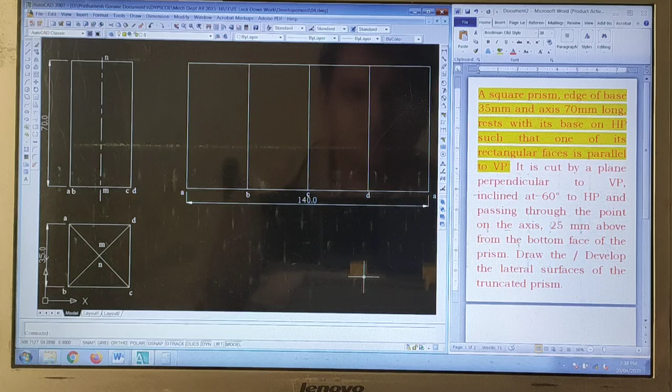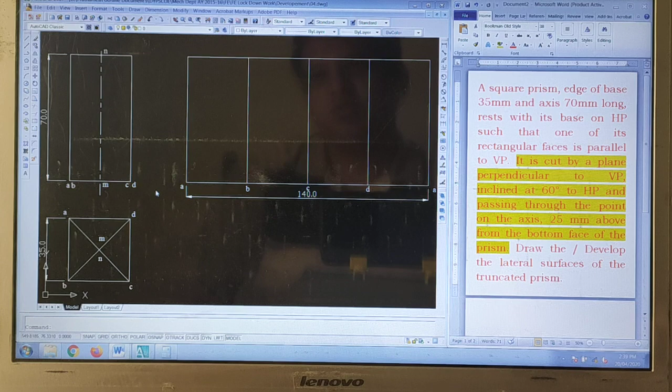Now this portion is what we are looking for in this particular solution. It is cut by a plane perpendicular to the VP, inclined at 60 degree to the HP, and passing through the point on the axis 25 mm above from the bottom face. So from the bottom face a line of 25 mm - intersection point will not be there.

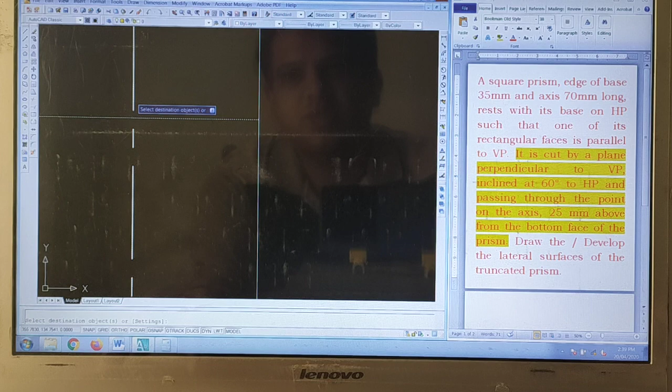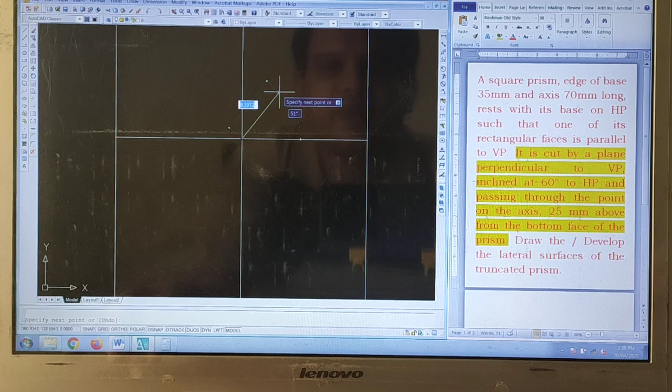So I have changed the property of this particular center line. Then a line at an angle of say 30 mm, then less than sign at an angle of 60 - this line we have drawn.

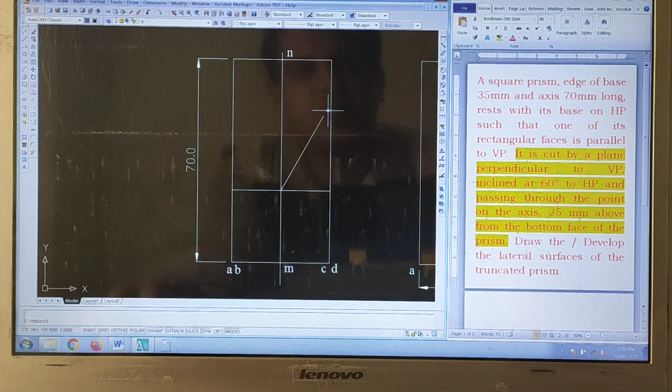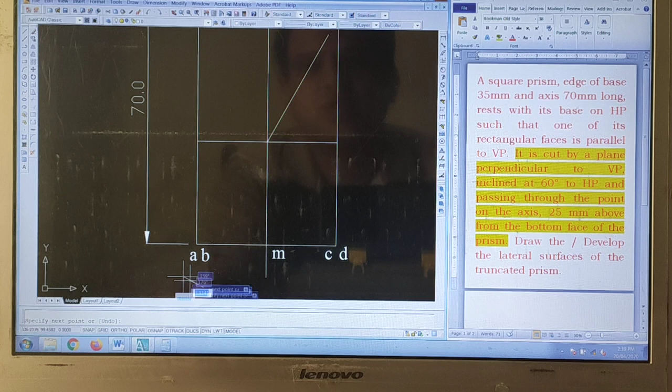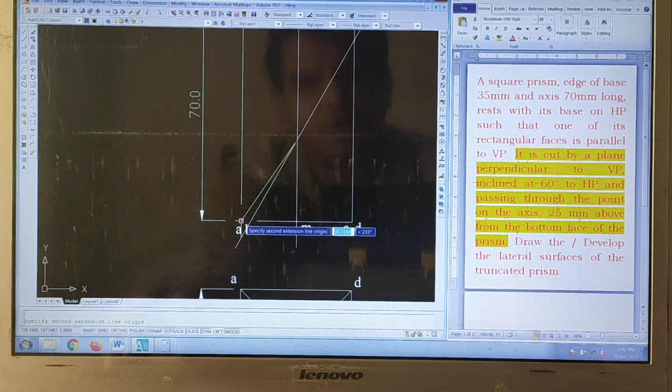Now it is up to this point only, so let us extend this, and over here let us extend the same line till this point, like this and like this, and let us delete this line, delete this line too, and mark the dimension of this particular point as 25 mm. Now we can convert this into a center line. Now this is what they are talking about, and this is also a cutting plane, so which equals to center line only, but whose color we should change to the yellow one.

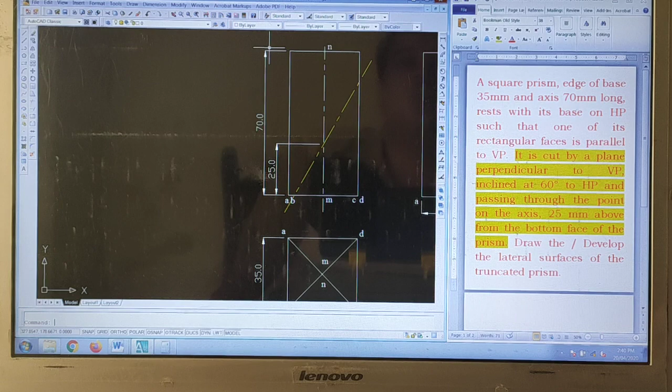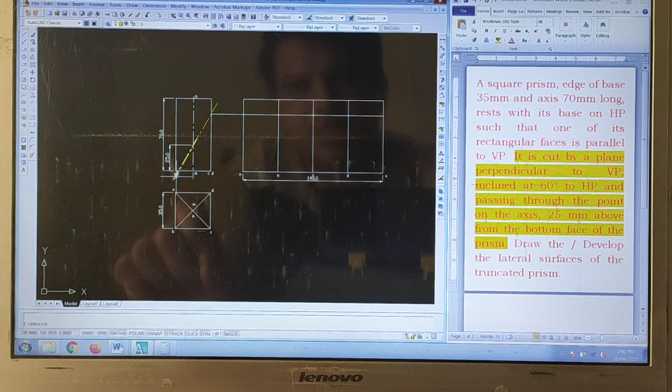Now see, this is what is being cut. Now we need to project this particular point from here by keeping ortho on till this point. Then lateral part we can trim. Then from AB we need to measure this distance.

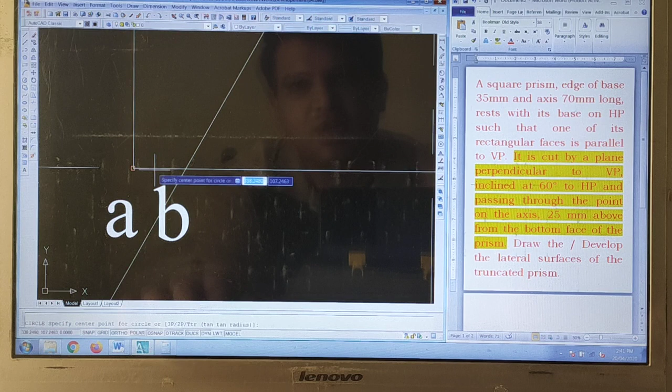Again we don't have point over here, so let us change this line like this, circle from here to here, and this is from B to C. Are you getting me? No, not from here. That needs to be drawn from the top view, but it will be the same.

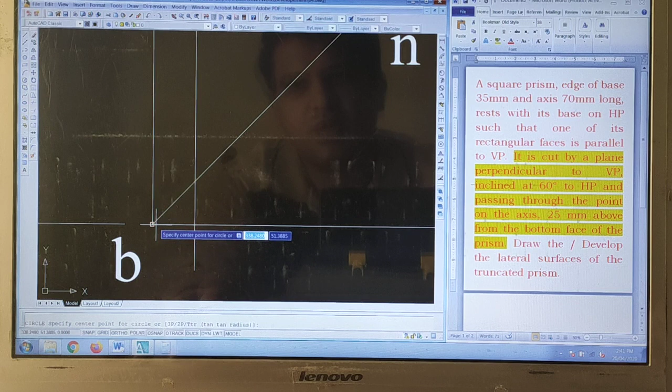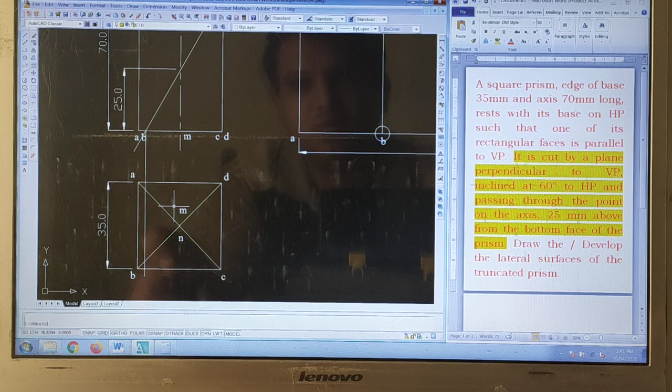Circle from here to here. How much it is? It is from B to C. Now this needs to be moved from this particular point on B. Same is there on A to D. So this needs to be shifted from this point to this point, A to D.

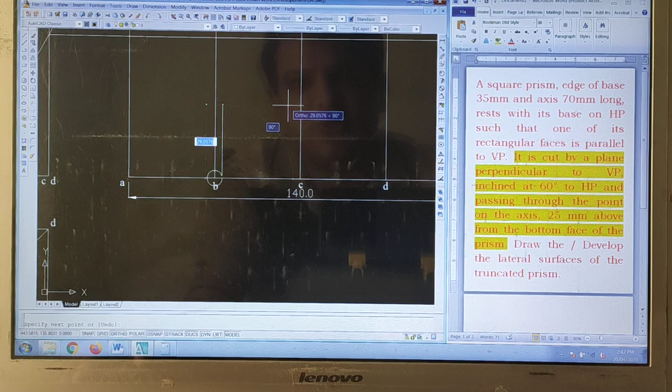Now these are the points. This is the first point, this is C, as well as the D point - let us draw it - and this is the last point. If we delete this, and if we delete this particular projection, this is what we are going to have.

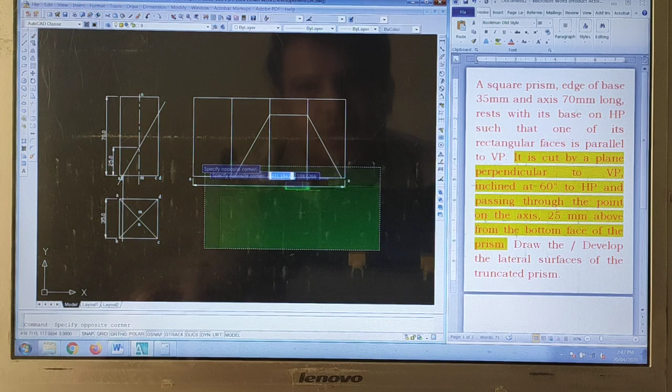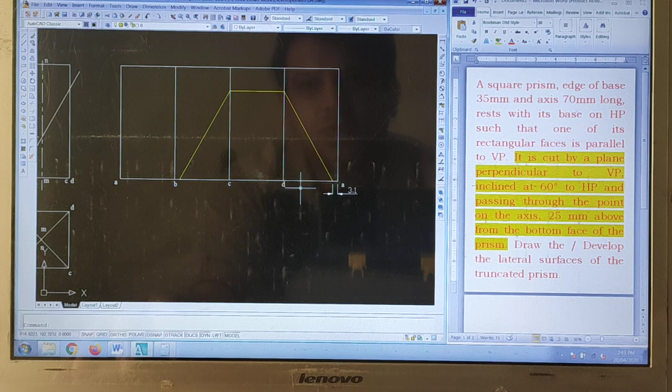Are you getting me? Now let me copy this, so that we can change the color of it. Yellow, let us make it yellow. And these lines are nothing but the yellow lines, and this dimension is over here.

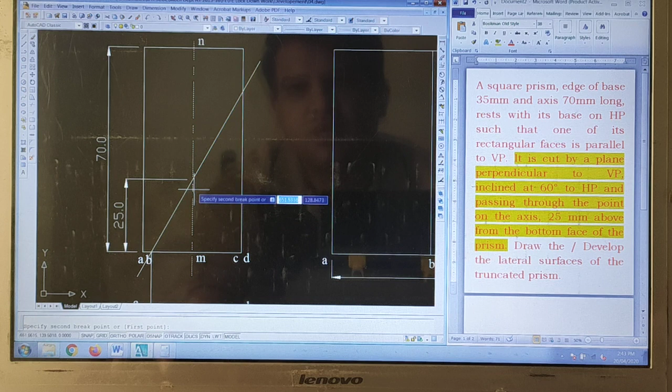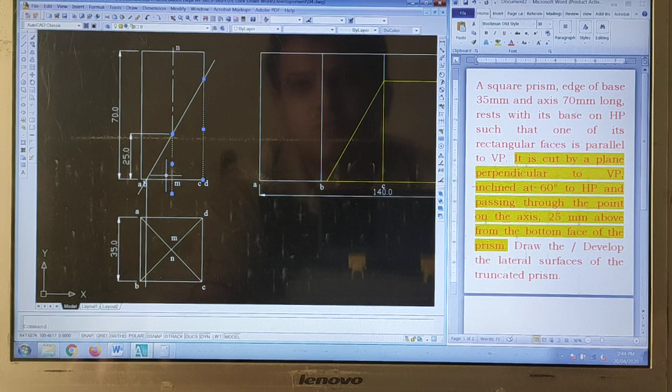Similarly, here it has to be cut from here, this needs to be cut from here, this needs to be cut from here, and its extensions. The whole will be of yellow color. So this is how the dark portion you will draw.

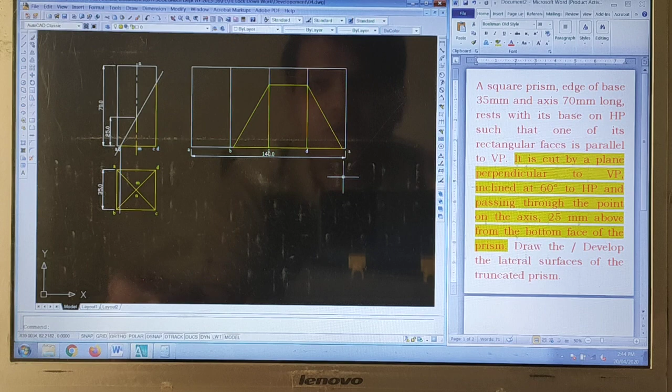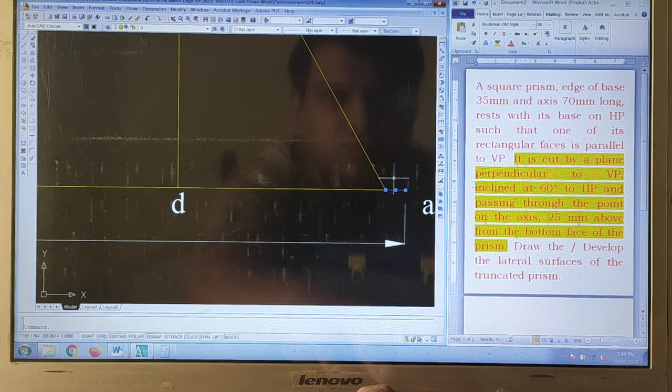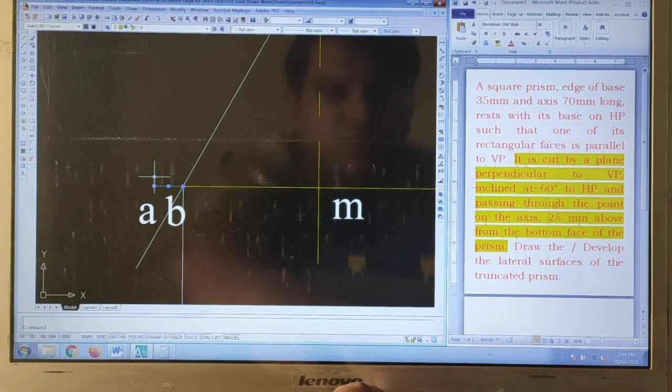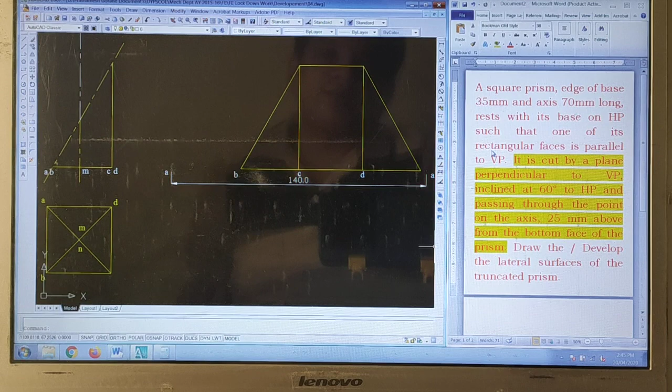When we want to see the solution part, let us copy it again. We will remove all other lines. This is what is the solution. All the other unwanted lines are being deleted. And this is nothing but the center line of color yellow. So this is what is the solution for getting this kind of prism.